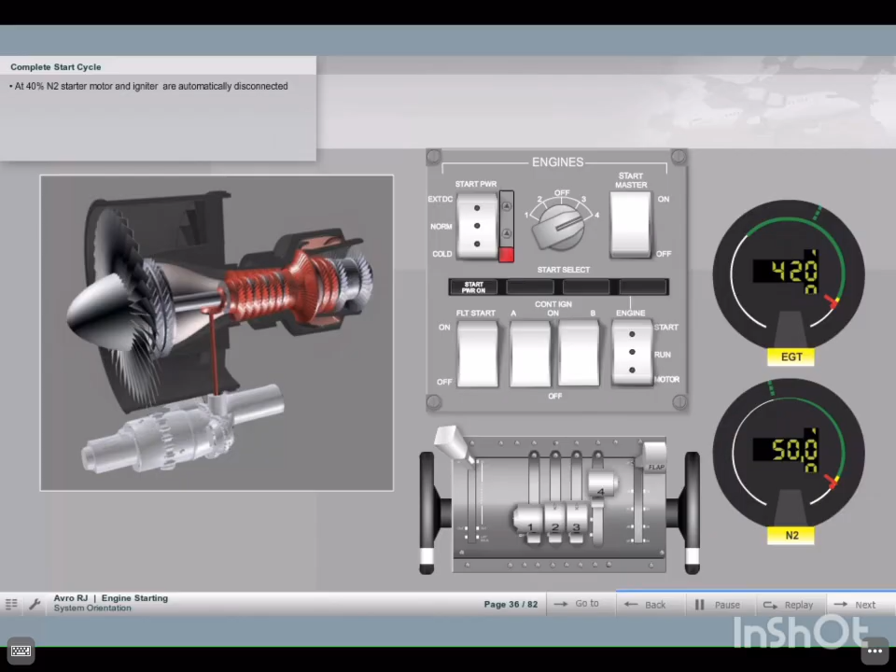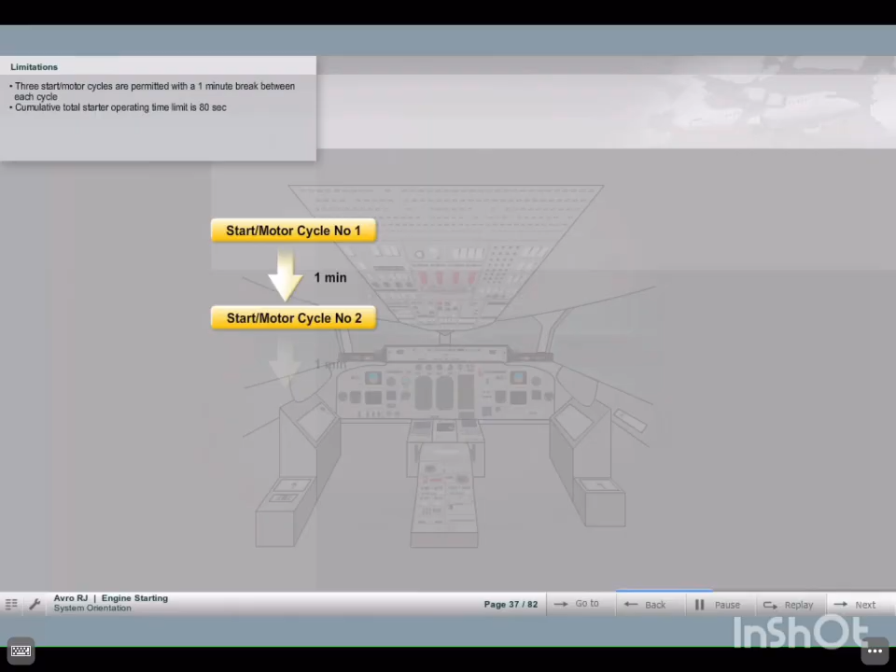Starter motor cycles. A maximum of 3 successive start motoring cycles are permitted, with a 1-minute break between each cycle. In this case, the cumulative total starter operating time limit is 80 seconds.

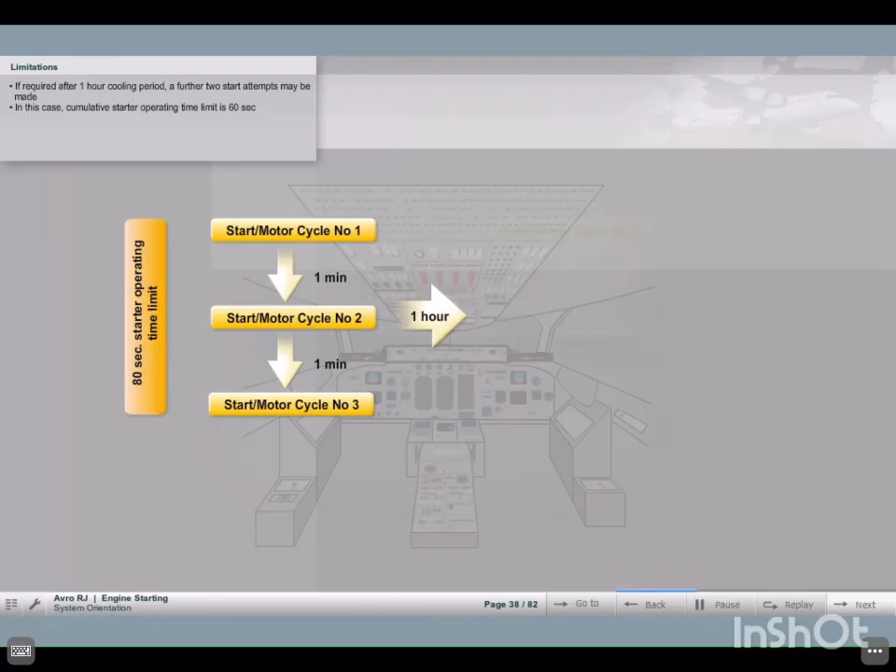If additional start attempts are required, a delay of 1 hour must be made to allow the starter motor to cool. Thereafter, a further 2 start attempts may be made. In this case, the cumulative total starter operating time limit is 60 seconds.

A cooling period of 4 hours is required before the initial cycle can be repeated. An engine start cycle may be continued providing N2 reaches 20% before the total starter operating time is exceeded. Each engine motoring cycle must not exceed 20 seconds duration.

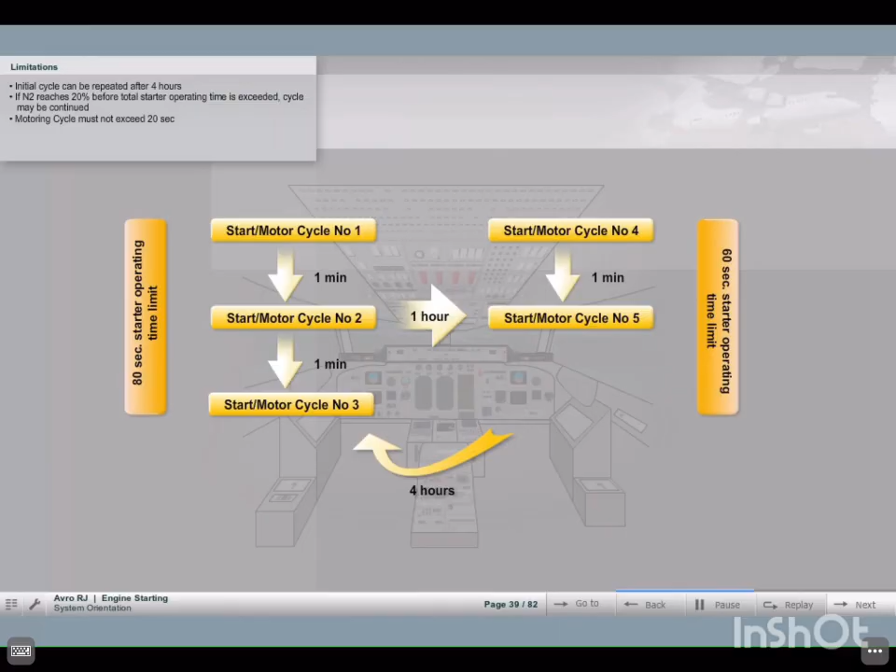Engine start limitations. Maximum EGT for engine ground and flight start is 649 degrees Celsius. An overshoot up to 713 degrees Celsius is possible but shall not exceed 15 seconds.

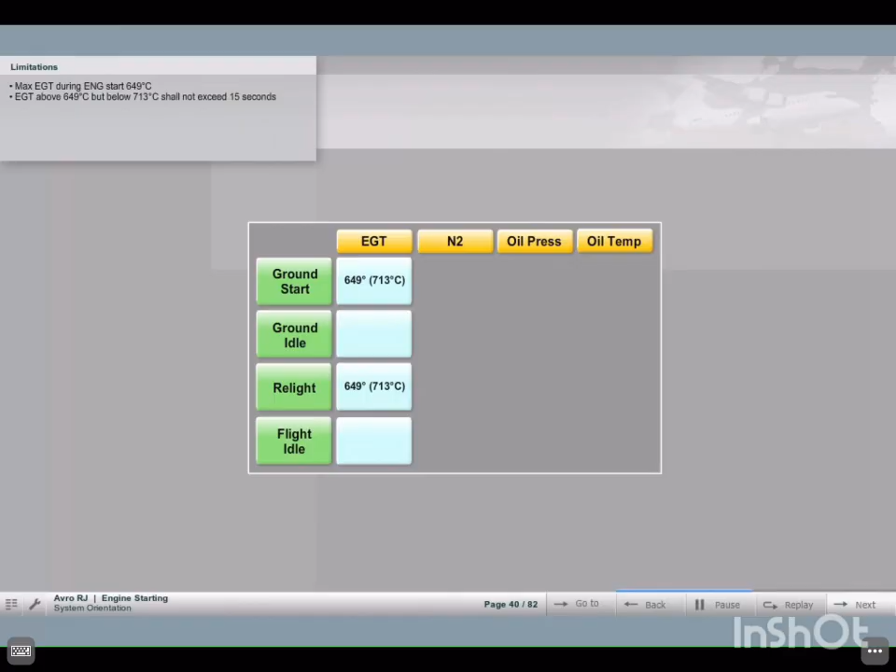Ground idle is 49 to 54% N2; with FADEC off, ground idle is 49 to 75% N2. Minimum N2 for in-flight start is 6%. Do not restart engines if N2 has indicated below 1% for more than 7 minutes. Flight idle is 59% N2 minimum or 67% N2 minimum in icing conditions.

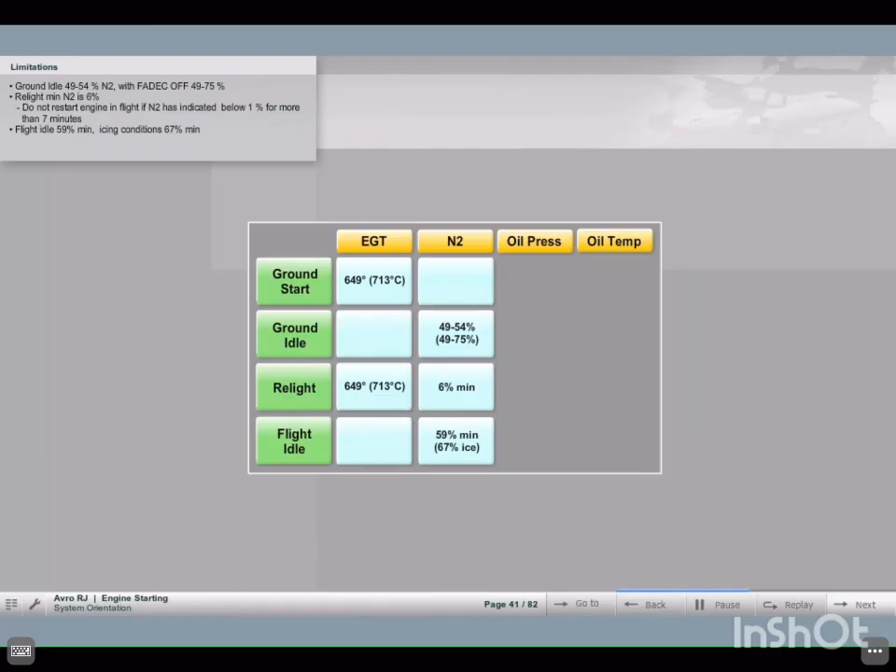The minimum oil pressure during ground idle is 25 psi. The minimum oil pressure during flight idle is 35 psi. Maximum oil temperature is 133 degrees Celsius.

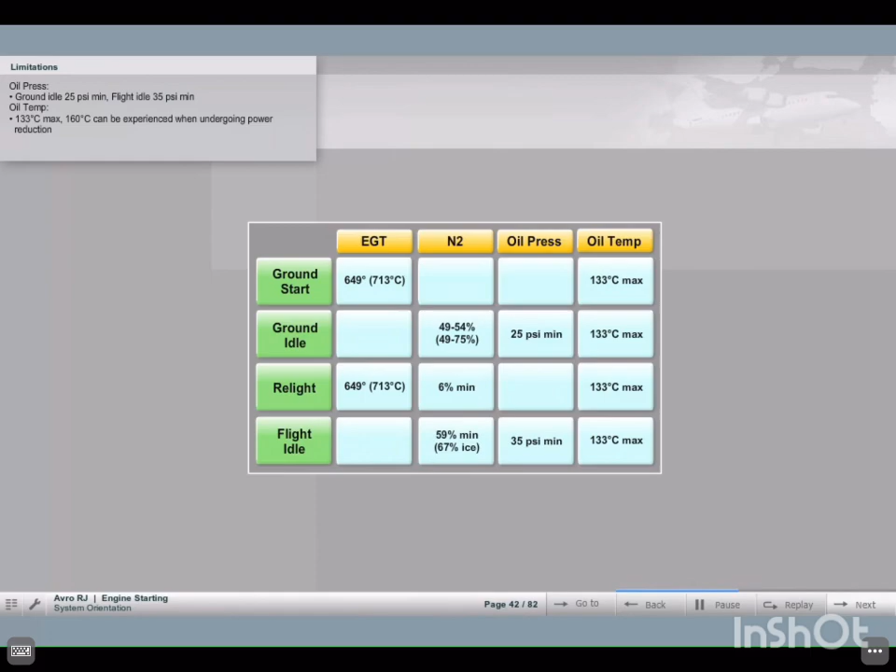160 degrees Celsius can be experienced when undergoing power reduction. Recovery of an acceptable oil inlet temperature should occur after 2 minutes of steady-state operation.

Relight envelope. Engine start in flight is possible up to 20,000 feet. Airspeed should be established between 185 and 240 knots indicated airspeed, and N2 should be 6%. Relight may be attempted up to 25,000 feet, but the start may not be successful.

After the AC bus bars have been powered, the ground ignition switch is set to either A or B as required by airline policy. The ignition systems are normally alternated on a daily or sector basis. Both engine ignition A on and engine ignition B on annunciators are checked off.

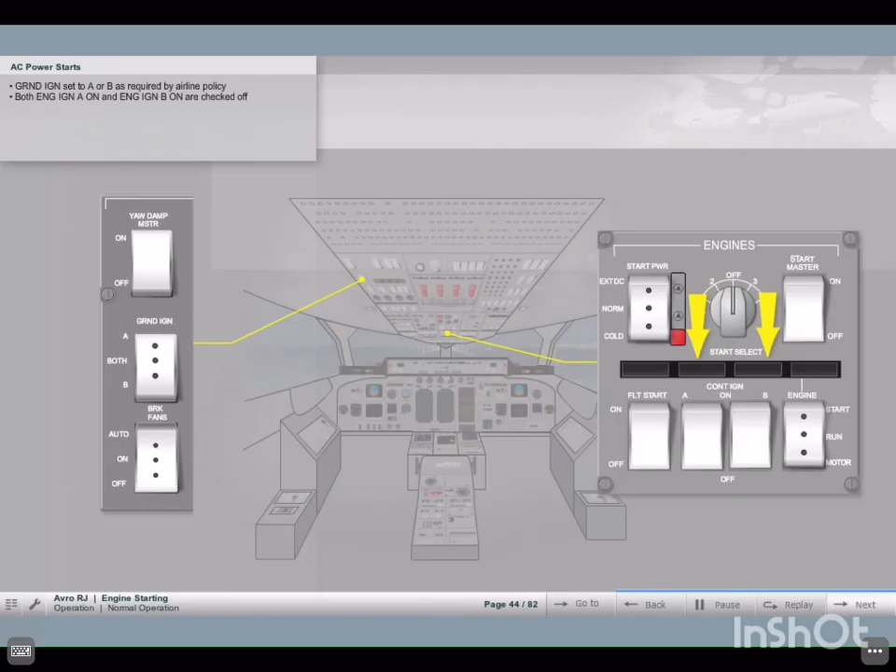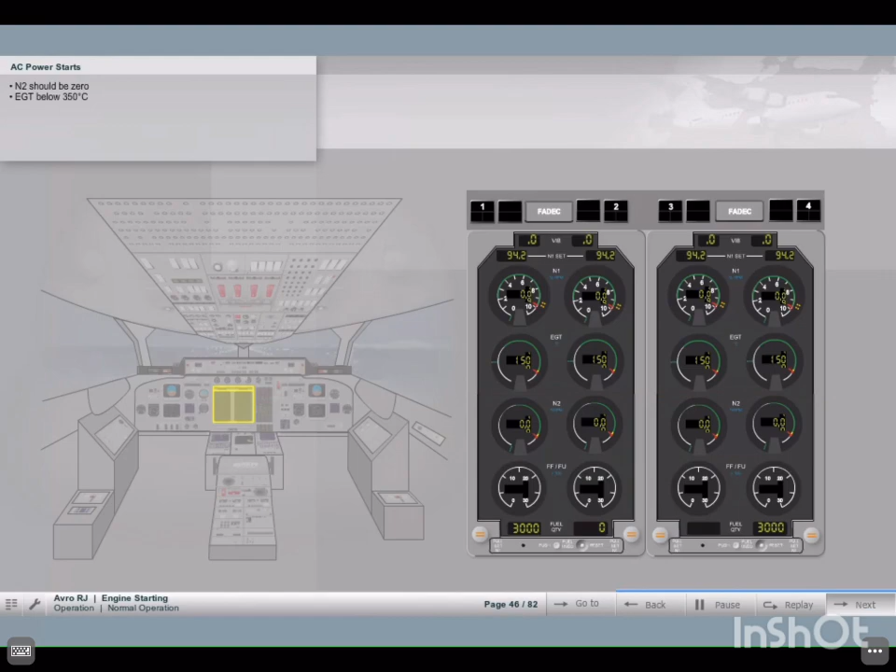The FADEC fault off annunciators should be extinguished. N2 should be 0 and EGT below 350 degrees Celsius for each engine to be started. The electrics panel is checked to ensure that a single AC supply is selected on.

All 4 engine NTI switches must be checked on to extend the operation of the automatic surge protection system. On the engines panel, the start power switch is checked at normal. The Start Master switch is selected on. This will connect the start power source to the start bus, which is confirmed by the white Start Power On annunciator.

The Start Select switch is rotated to the first engine to be started, which is normally engine number 4. The engine switch should be pressed and then released. This selection engages the starter motor and ignition circuits, which can be confirmed by checking that the white starter operating and the green engine ignition A or B on annunciators illuminate.

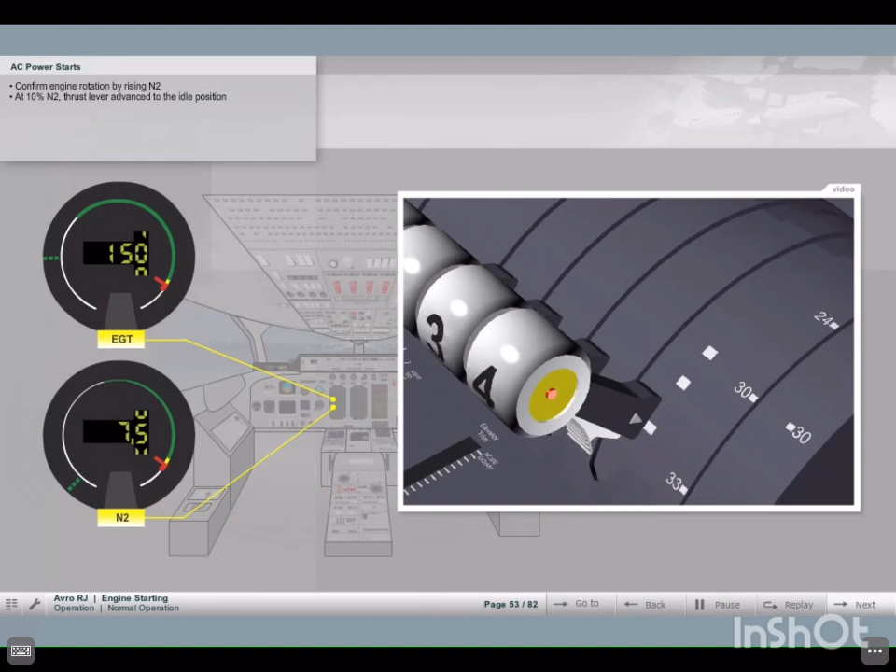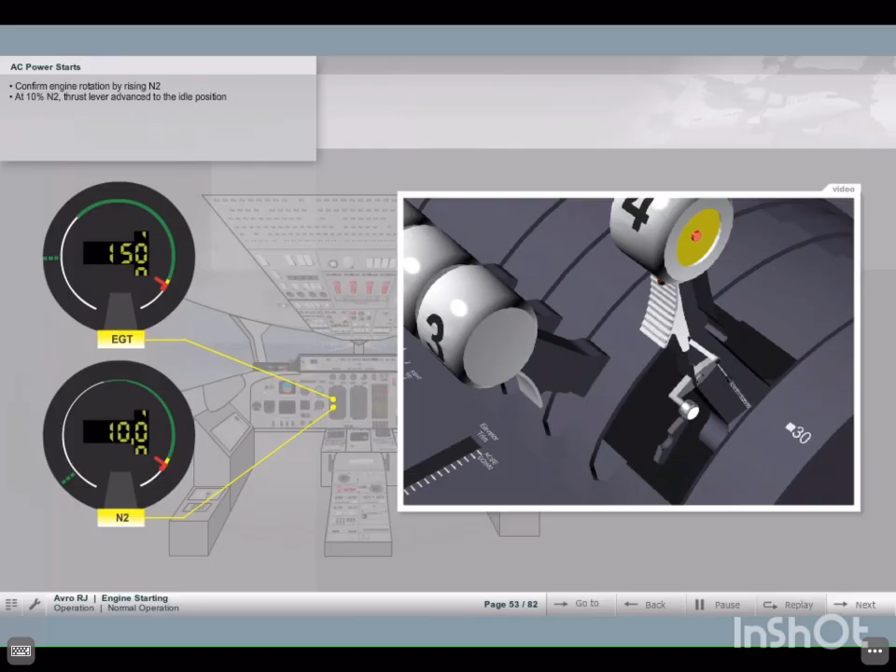Engine rotation is confirmed by checking the N2 gauge. When N2 reaches 10%, the thrust lever trigger is depressed and the thrust lever advanced to the idle position. Within a few seconds, fuel ignition occurs, which is indicated by increasing EGT.

Once this increase is observed, a check should be made to ensure that the fan is rotating by checking the N1 gauge. Oil pressure is checked to ensure that it is rising. It is now essential that the N2 and EGT gauges are monitored carefully for any abnormalities until the engine stabilizes at idle.

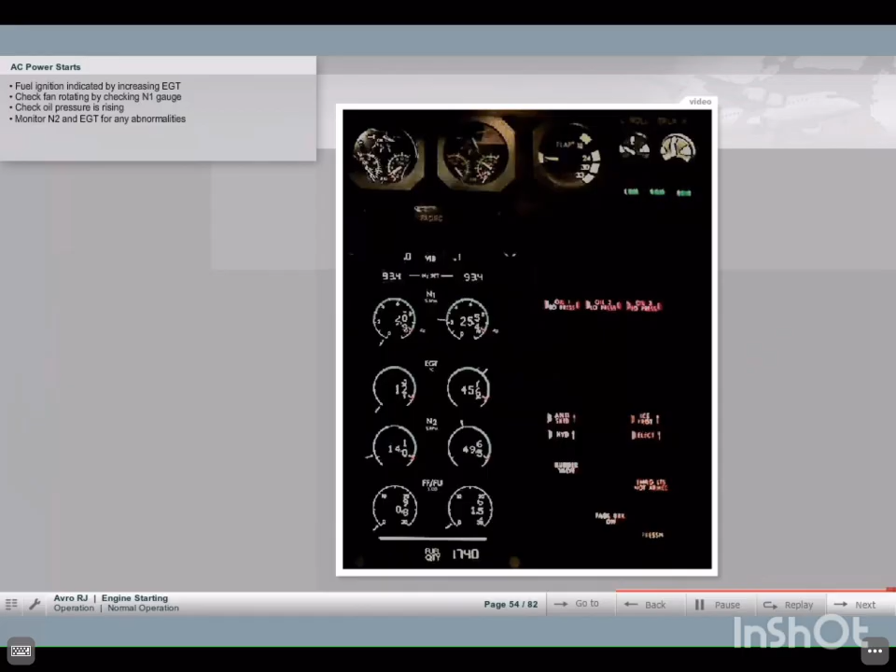At 40% N2, ignition stops and the engine ignition A or B on annunciators extinguish. The starter motor is also disconnected at 40% N2. However, the starter operating light may remain illuminated for a few seconds. The starter operating annunciator must be out within 10 seconds of reaching ground idle.

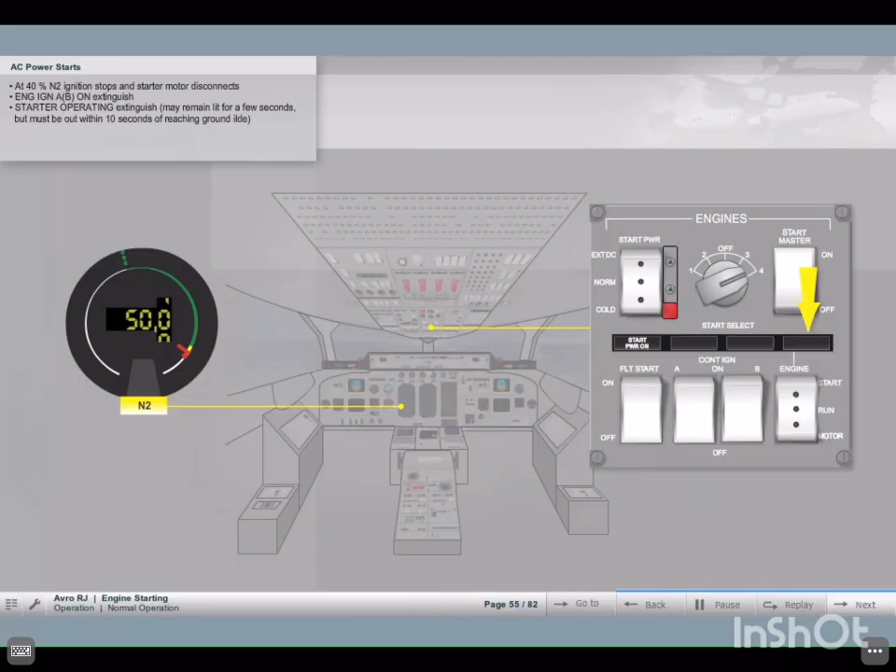Once the engine stabilizes at idle, all engine parameters are checked for any abnormalities. These include fuel flow, N2, EGT, N1, oil pressure, and the oil low pressure annunciator.

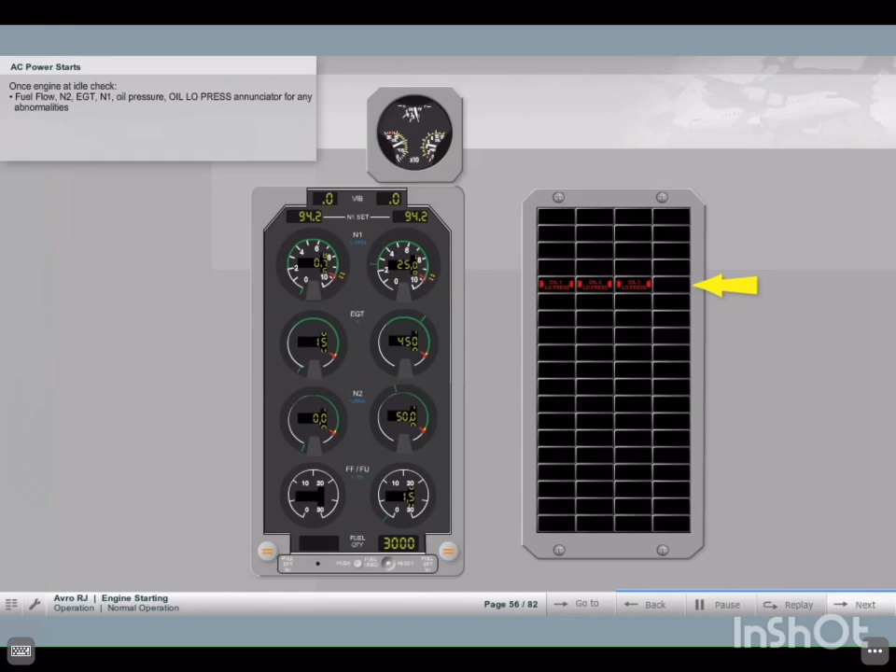Once a successful start has been achieved, the Start Select switch should be rotated to the next engine and the sequence repeated. Starter operating and engine ignition annunciators must be out before selecting the next engine.

Following start of all 4 engines, the Start Power switch is checked at normal, and the Start Select and Start Master switches should be selected off. Start Power On must be checked off to confirm that the start bus is no longer powered. The engine NTI system can now be selected as required.

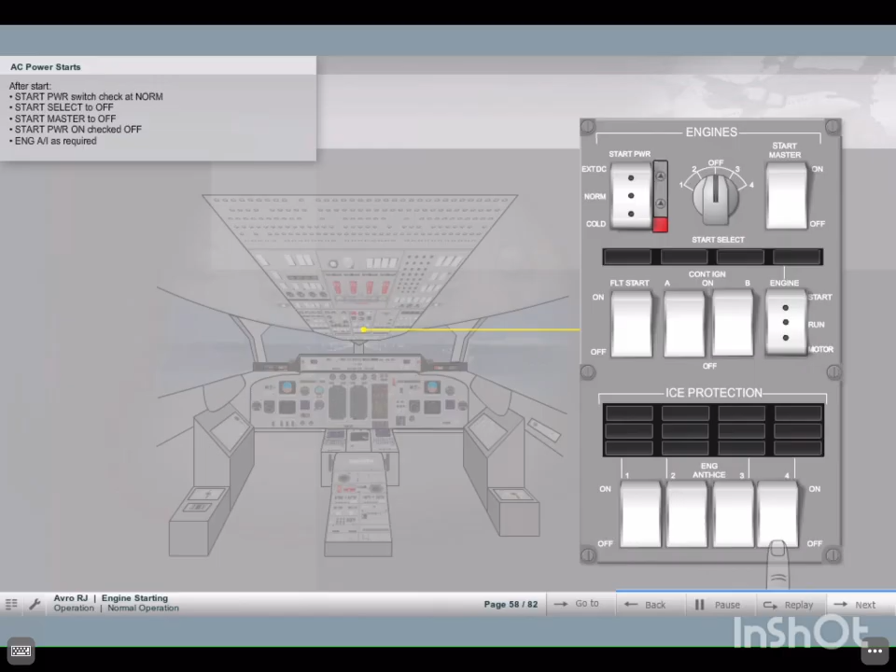If an engine generator is to be used as the AC power source, N2 must be increased to 60%. This ensures that the generator load does not pull engine speed below idle. In high ambient temperatures or at high altitudes, 65% N2 is recommended.

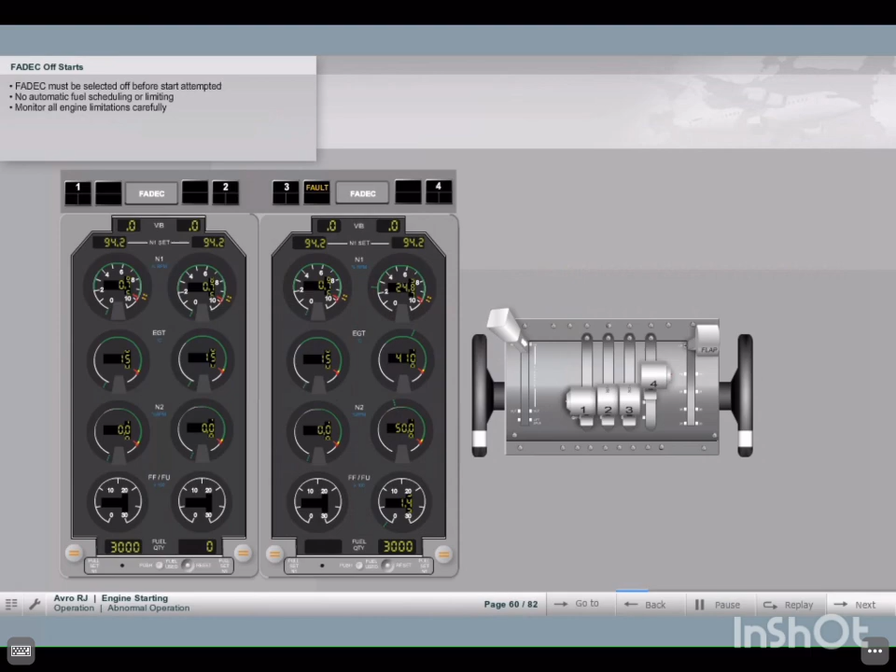If a FADEC is unserviceable before start, it must be selected off before a start is attempted. There is no automatic fuel scheduling or limiting with FADEC off, so it is important that all engine limitations are monitored carefully.

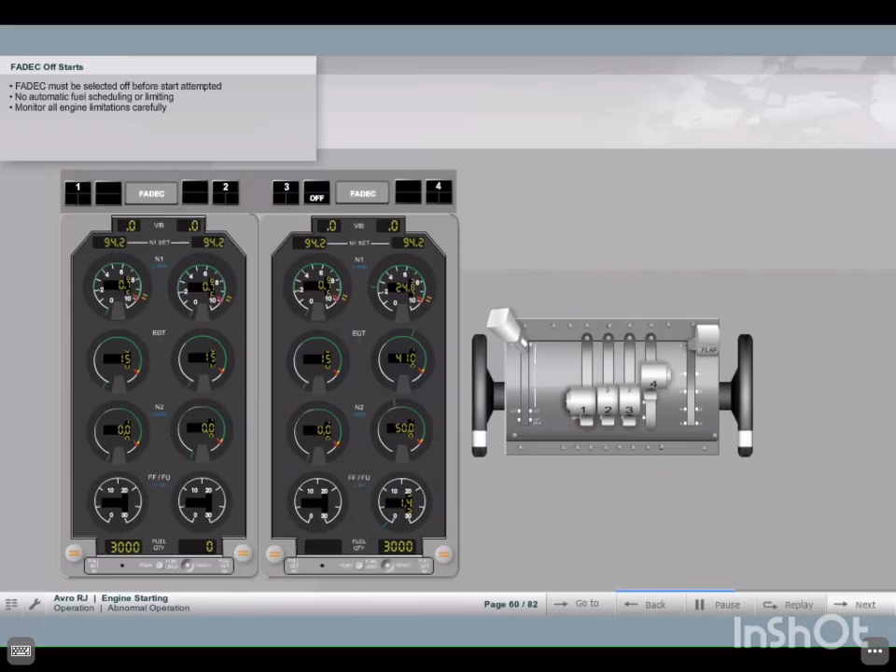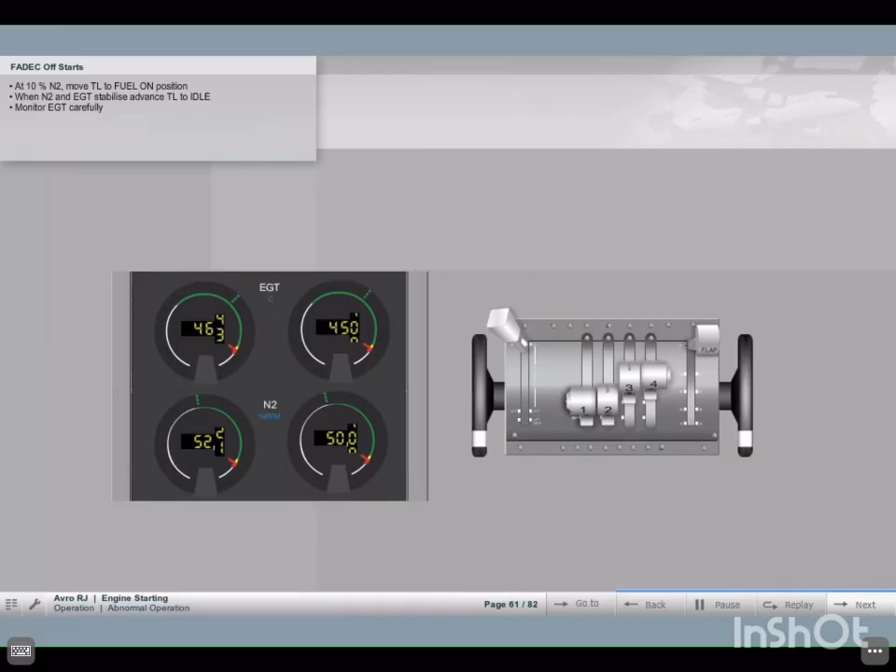The engine start is carried out as normal, but at 10% N2, the thrust lever should be moved to the intermediate fuel on position. When N2 and EGT stabilize, the thrust lever should be advanced to idle, whilst monitoring EGT carefully. The engine should accelerate to idle between 49 and 75% N2.

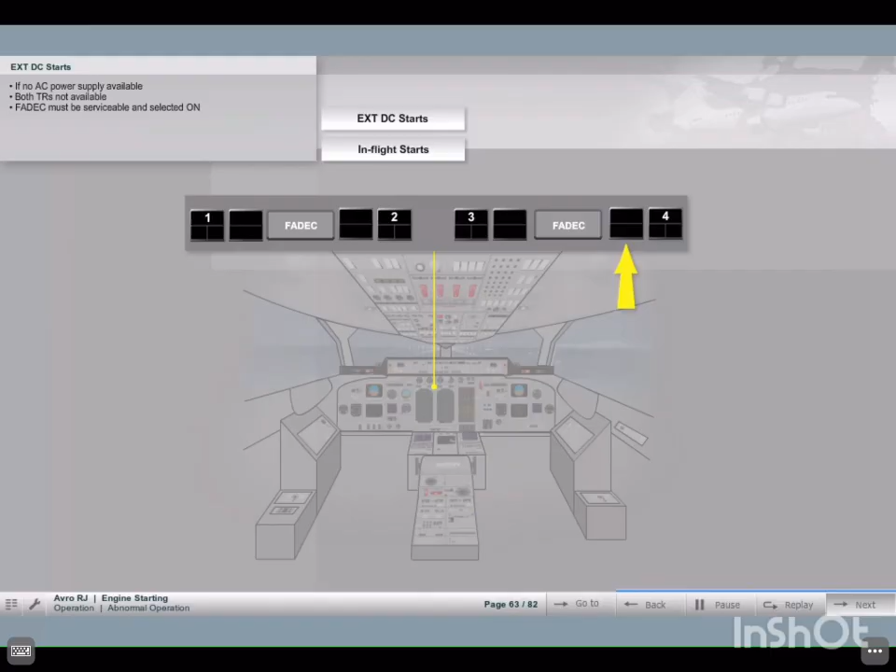If AC power or both TRs are not available for starting, DC power may be used. The FADEC must be serviceable and selected on. This procedure is prohibited if the FADEC is off. The batteries are selected on and their voltage checked.

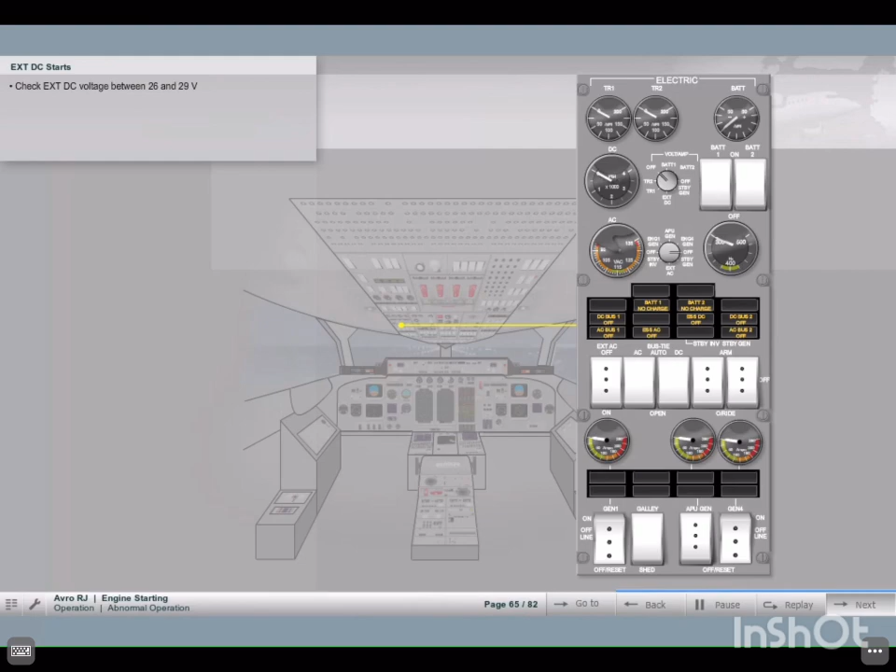External DC power is connected to the aircraft and the voltage checked between 26 and 29 volts. Start power is selected to external DC and Start Master is selected on. Start power on should be lit.

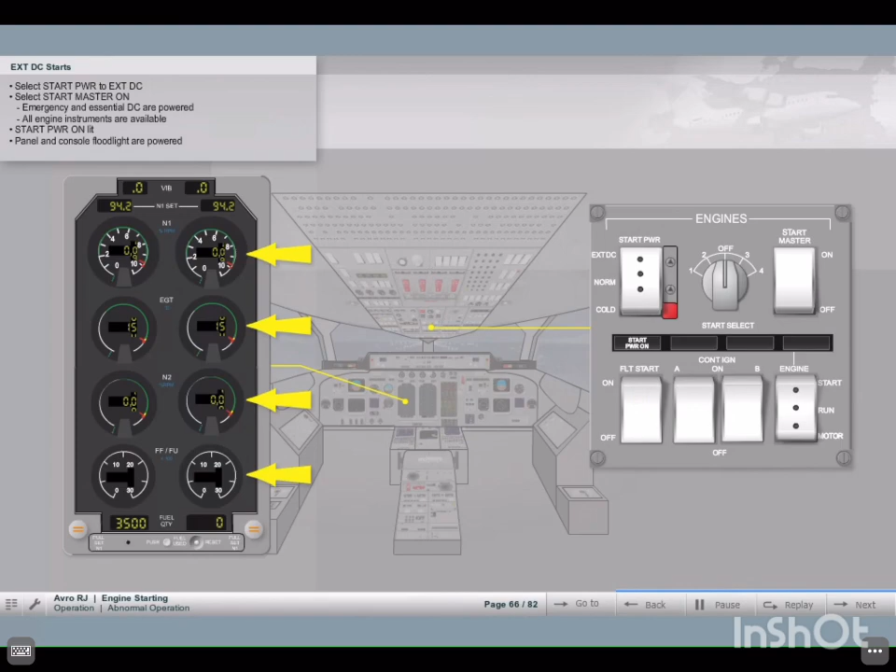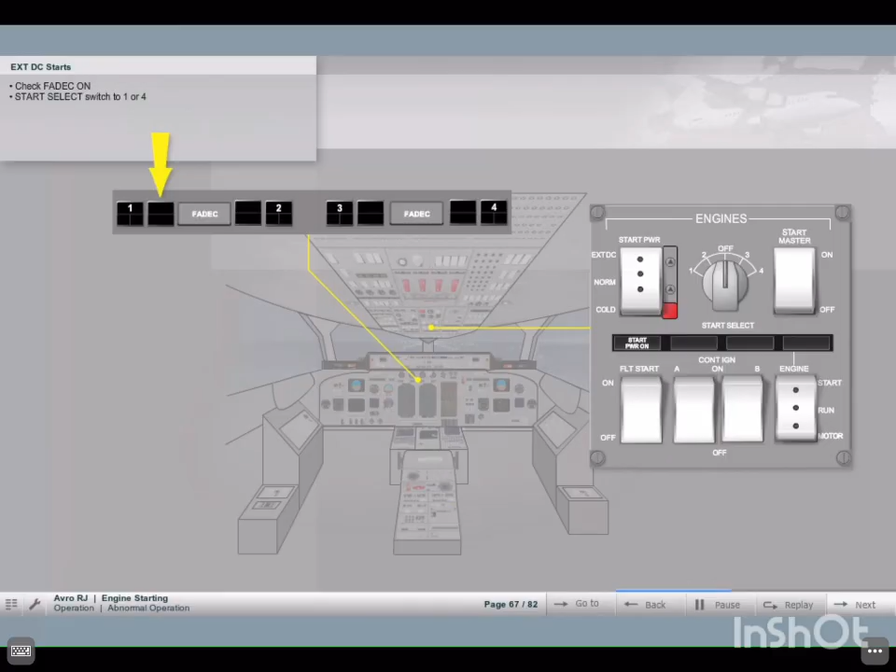When Start Master is selected on, the emergency and essential DC bus bars are connected and all engine instruments are now available. In addition, the panel and console floodlights are powered. The FADEC for the engine to be started is checked on. The Start Select switch is rotated to either engine number 4 or 1.

The engine switch is selected to start and the ignition and starter annunciators checked. FADEC fault may illuminate briefly, indicating that automatic EGT over temperature protection is not available. If it does illuminate after selecting start, fuel must not be selected until it has been extinguished for 5 seconds and N2 is above 10%.

When N2 reaches 10%, the thrust lever trigger is depressed and the thrust lever advanced to the fuel on position. The engine will accelerate to idle with the thrust lever in the fuel on position because the FADEC is scheduling fuel. When the engine stabilizes at idle, the thrust lever is advanced to the idle position.

The bus bars can now be powered from the engine generator, allowing the remaining flight deck safety checks to be carried out. The other engines can be cross-started with AC power now.

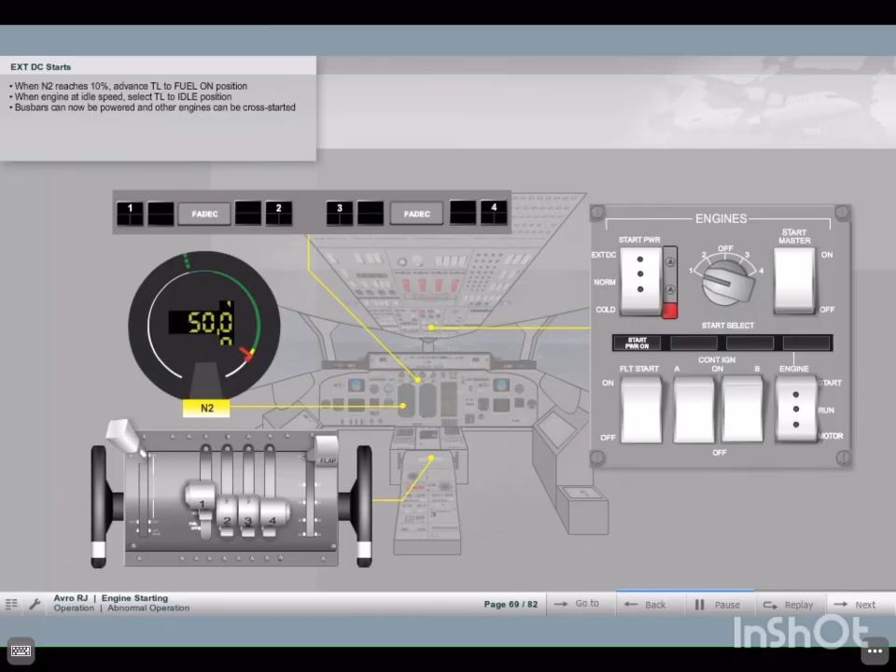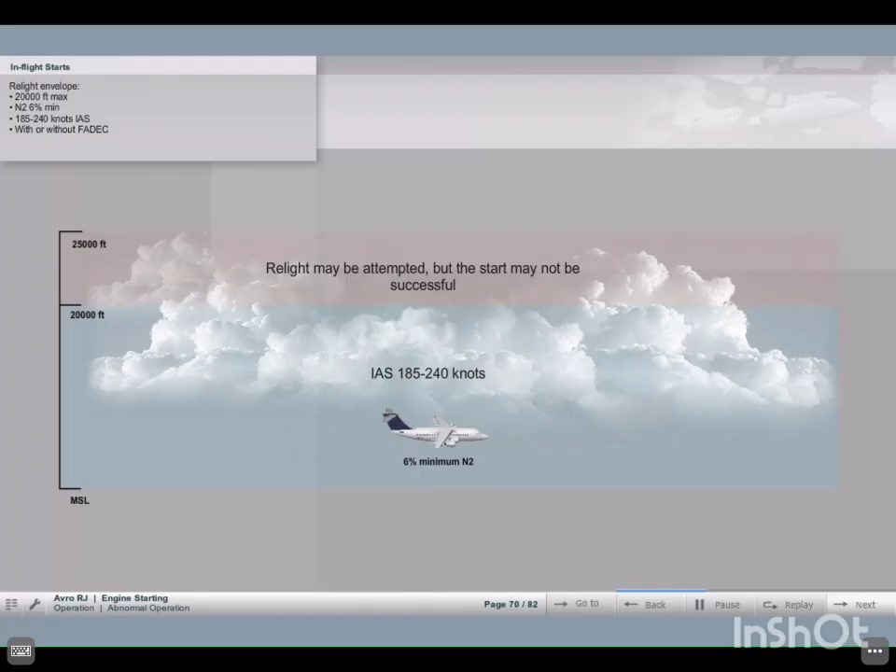In-flight engine starts can be carried out with or without FADEC. The relight envelope for in-flight starting is up to 20,000 feet at speeds between 185 and 240 knots. A start may be attempted up to 25,000 feet, but may not be successful.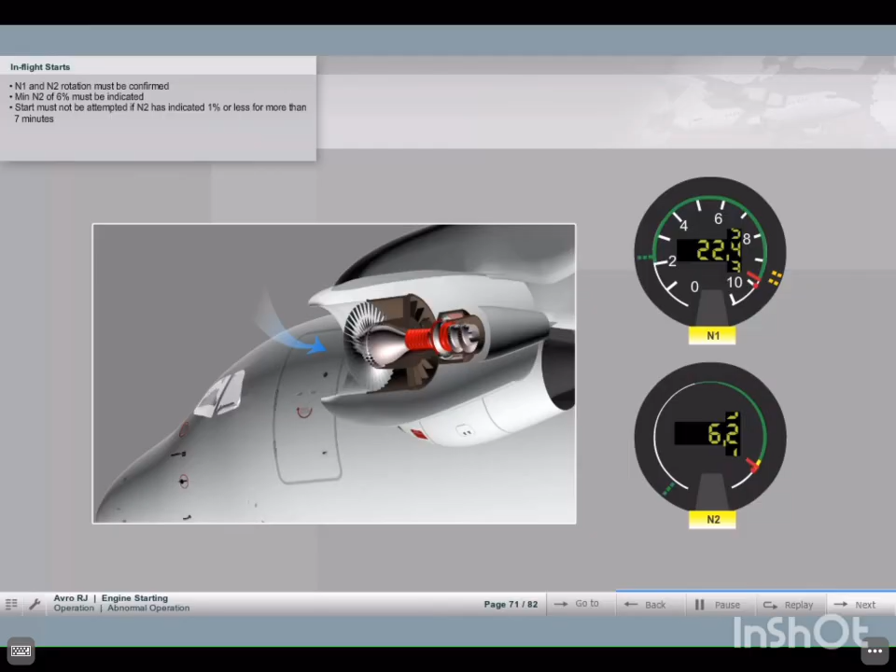Before starting the engine, rotation of N1 and N2 must be confirmed. A minimum of 6% N2 must be indicated. N2 may be increased if necessary by increasing airspeed. However, a start must not be attempted if N2 has indicated 1% or less for more than 7 minutes because of the danger of engine core seizure due to lack of oil pressure. The relevant thrust lever must be in the fuel off position, and either the generator or